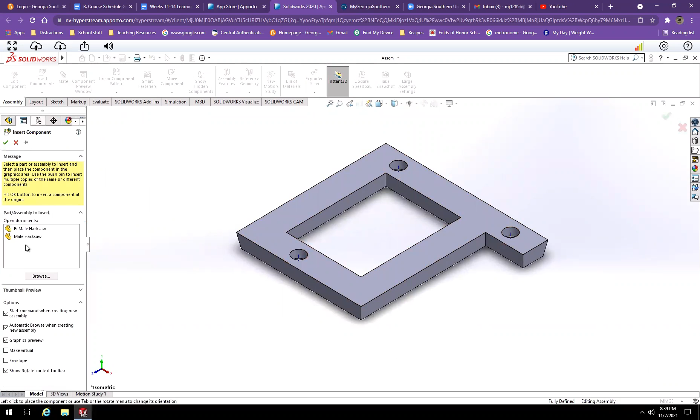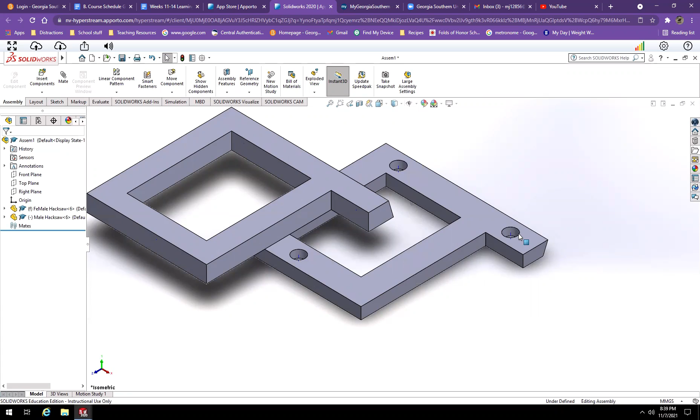Before we begin, we're going to come up here to the Hide All Types button, go to the down arrow by its side, and make sure that the View Temporary Axes button is turned on. What this will do is it'll create a nice axis of symmetry around every circular feature. So it'll create a nice little line here at the holes, but also create one at the pins as well.

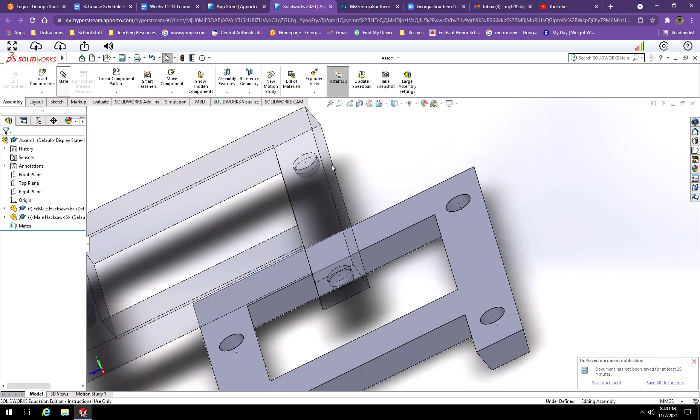Next, I'm going to click on one of the parts, right-click it, and click Change Transparency. This will make it easier for us to see through the part so that we can make sure the pins are lined up with the holes. Next, I'm going to click Mate and begin by clicking one of the axes of symmetry for the pin and for the hole to line them up. I'm going to make sure this is a coincident mate and then click the green check mark.

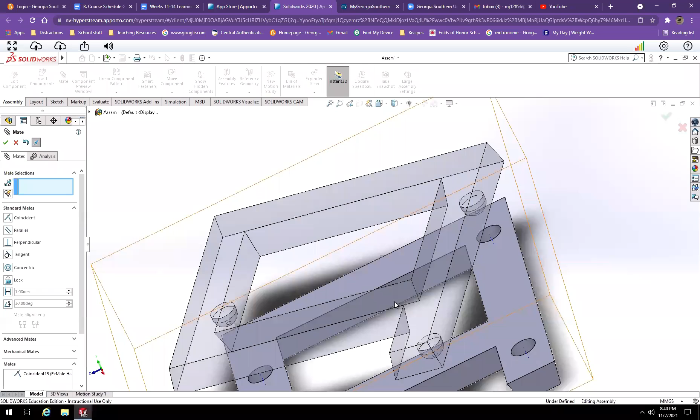Once I've done that, as you can see, the part is able to move and the lines are lined up, but the part is also rotating. To fix this, I'm going to create another mate using another axis of symmetry at the pin and another axis of symmetry at the hole. Once again, we're going to make sure this is a coincident mate and click the green check mark.

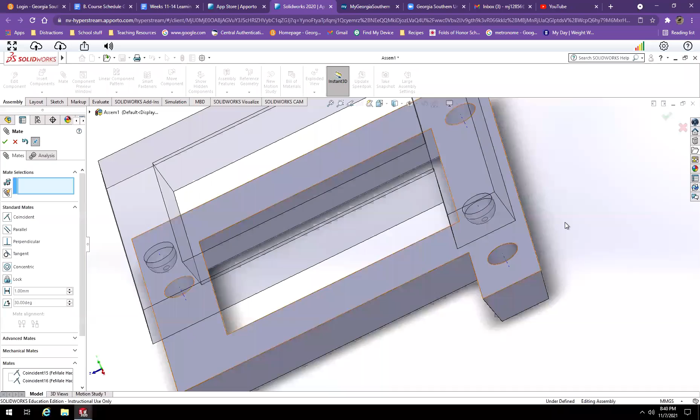As you now see, the part is able to move up and down, but it isn't rotating, which is what we want. Next, I'm going to line up the faces of the mate with each other so that they're right up against each other, clicking that face and clicking this face. Again, we're going to make it coincident and click the green check mark.

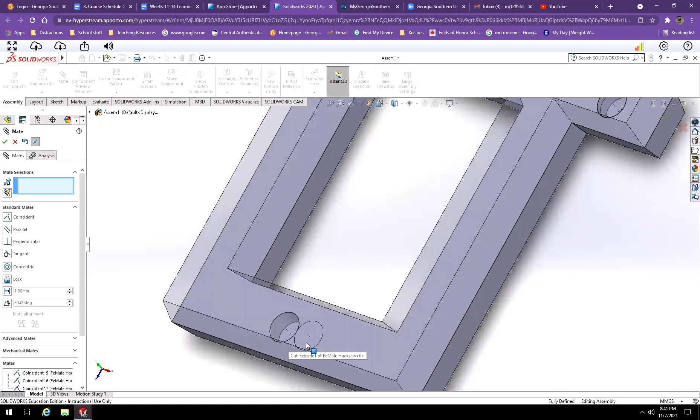So as you can see, the top 2 holes are lined up very nicely with each other, but the bottom hole here doesn't appear to be lined up at all. To fix this, we're going to go back to the original part file. I'm going to edit the sketch to see if we can't line up the hole with the pin. Let's change this to 2.5. Exit the sketch. And then we're going to go back to our assembly file.

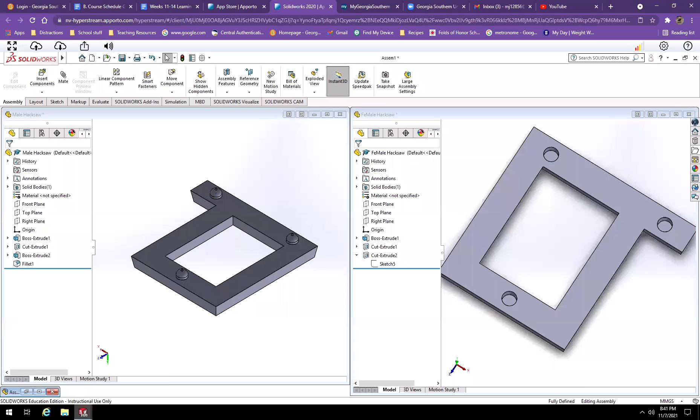It'll ask you, since you've changed one of the parts, to rebuild the assembly. Go ahead and click Yes. Once we've done that, we're going to pull the assembly file up. And if we now look, the pin and the hole are lined up.